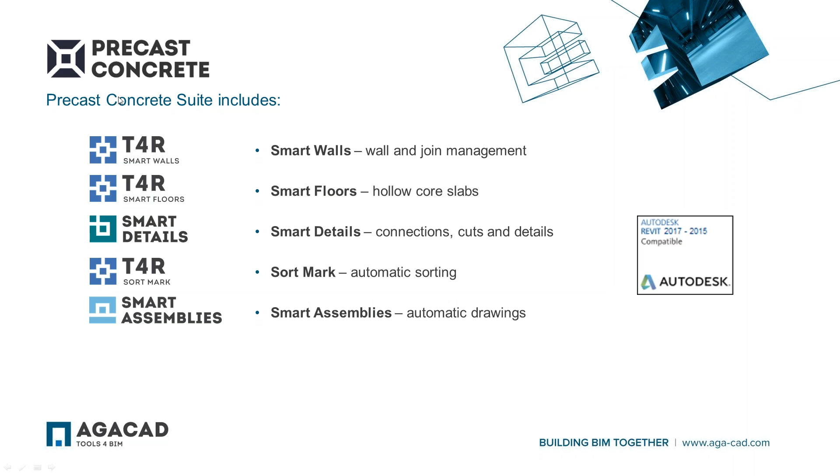So today I will talk about the Precast Concrete Suite, which helps to work with precast elements in Revit. So we will see how to create elements, insert details, sort elements, also create automatic drawings. So you can see here I will talk about these add-ons, these tools which are included in Precast Concrete Suite. So these are different solutions and I will show how they work.

And so you will learn how to divide walls with different splitting options, then how to generate hollow core slabs, how to create connections and details, how to insert cuts to different elements, how to automatically renumber them according to different rules, how to prepare shop drawings of assemblies, and also I will mention the dynamic update assembly functionality. So you will see how it works.

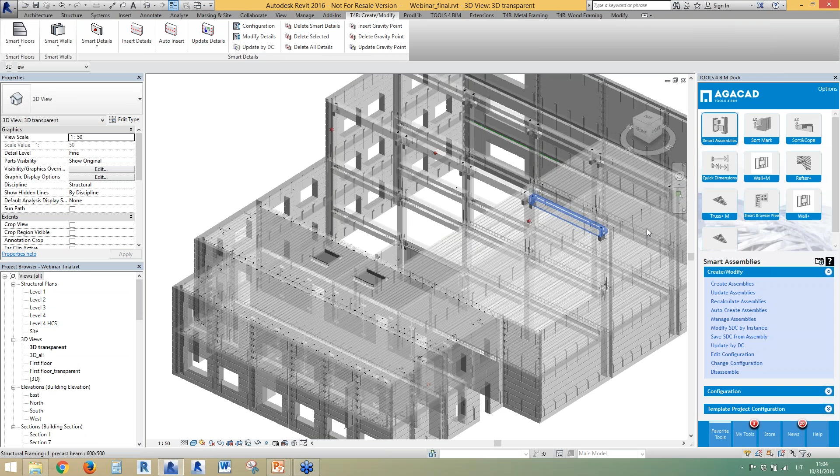Okay, so I will start the live demo. For that I will switch to the Revit screen. I will minimize this one. Okay, so now you see one sample project which I will use to demonstrate our solutions, and you will see how to insert, let's say, cuts, connection details, how to distribute all different kinds of elements you see in this model. Let's say how to create corbels, how to create insert details according to gravity point, and different other things, how to create hollow core slabs and so on.

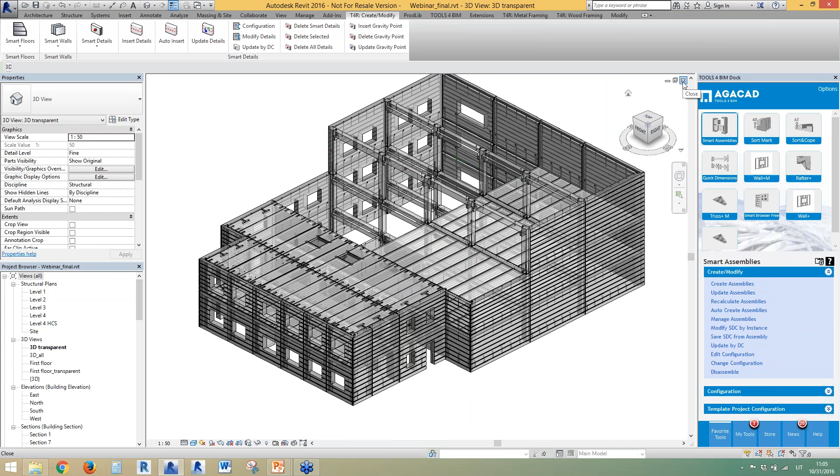So this is the final model, so I will maybe switch this off and I will start from a simple model. So with Revit you can model all of these elements using system walls, columns, beams and so on. But later we created solutions to make it work for other stages. From the beginning I will start with the smart wall solution. I will drag it here.

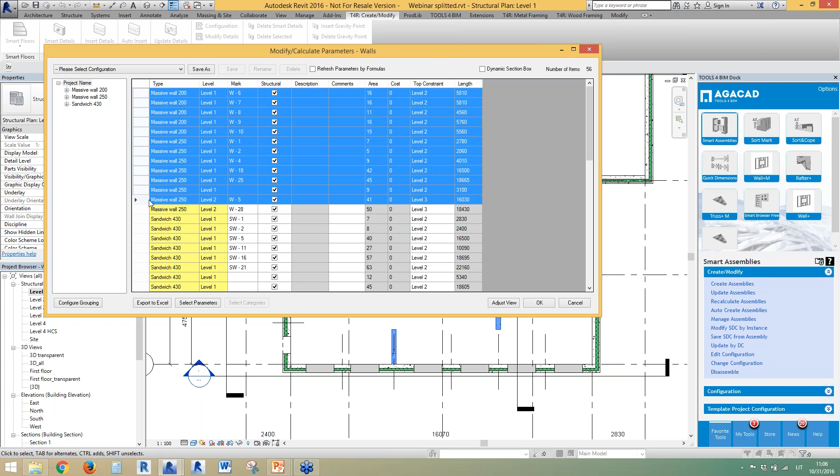You can also add any parameter you want here, and then you can use these columns to update information, check information or select elements in your project. Let's say if I drag this, you see the elements are selected also. So you can use this window for different tasks. And then let's go to other commands.

We also have functionality to decompose walls. So this function lets us, let's say, if I have a multi-layered wall, decompose it. Oh, this is configuration, sorry. This is the command to decompose wall. So what it will do, it will create 3 different walls instead of 1 wall. Or I can have 2 walls. Let's say I can separate architectural layers from the structural layers. And you see I have now a wall, and here I have a different wall and so on. So just this kind of possibility in this tool.

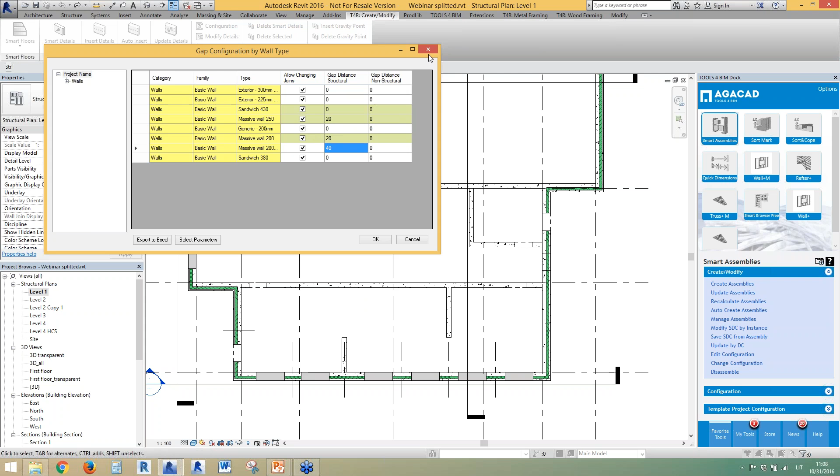And then I will talk more about splitting of a wall. So here you have gap configuration by wall type. If I open this window, you will see I have types of walls in my project, and then I can define the gap distance between the walls. So when I do the split, it will use this distance to make the gap between the walls. I can define this for structural walls and non-structural walls. I can define if I want to disallow joins or not.

So when I do this configuration, I can also define where I want to shorten the wall, at both ends or at one end. Then I have the possibility of disallow joins of walls. Then I have this split wall menu, with different commands for how to split the walls. So actually I will use 2 commands to do that. I will use this one to shorten picked wall end. So I will select that.

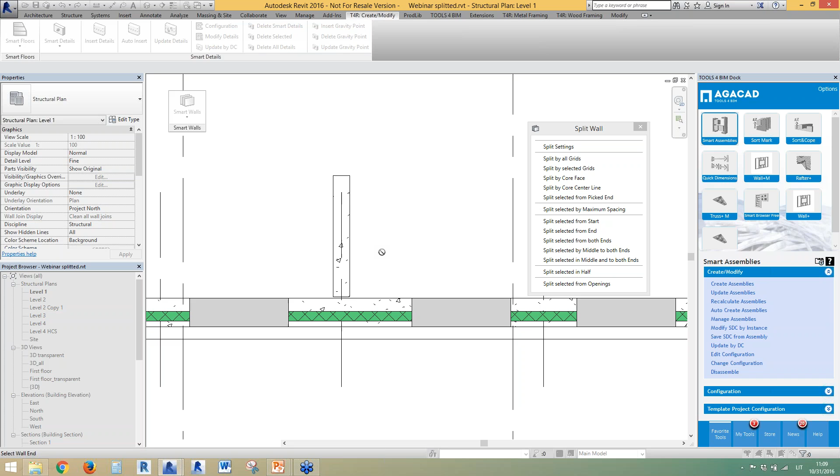And let's say now I have just 2 regular walls connected. I can select on this side of a wall, and I will have this gap which was defined in the gap configuration. I have this gap, I have the disallowed join of this wall, so I can go around and just disjoin these elements with the defined gap. Let's say I can go around and separate these walls as I want to have them as panels. Like this, like that.

Over here, let's say I can shorten like this, or if I don't like that, I can change that. Okay, so I will just go around a few more. I don't want to connect these walls, so I will do that. Okay. Let's just drag this one for the further process. Maybe I will do it like this. Okay, so when I disallowed joints and made this gap, I can use these commands.

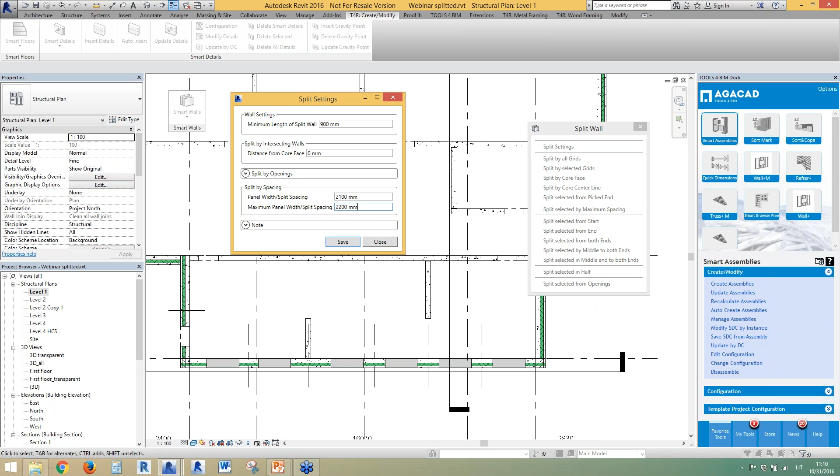So here I have split settings. If I open this one, you will see I can define the minimal length of the wall. I can define if I want to split at intersecting walls or by openings, and I can define the minimal distance from the openings. When I do automatic splitting, I will define the panel width. Let's say I want all the panels like this, and then the maximal panel width should be like this. Here's just information about the meaning of the start and end point of the wall. So I can change these configurations, and then I can use these commands.

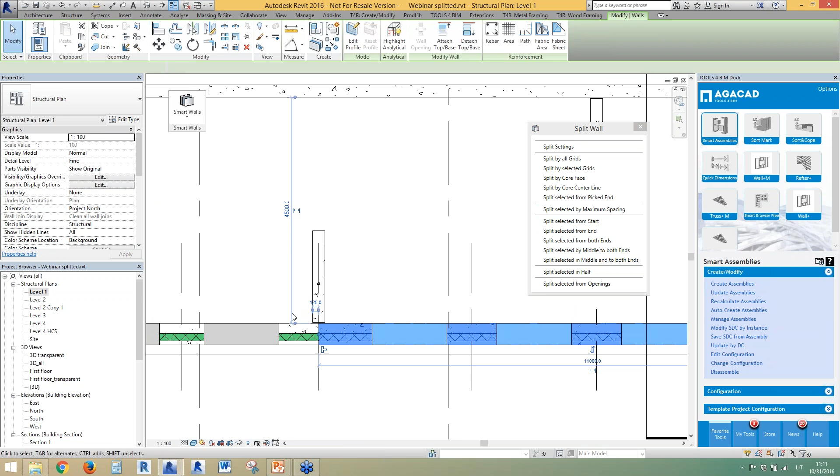Let's say I want to split by core center. So I will split this wall by using this element, and I will click escape. And now I have 2 walls split at this point. I have 0 gap for this type of wall, so that's why it's just a split wall with the disallowed joints function. Okay, let's do that a few more times. I select the wall, I select the splitting wall, and I have this separated. Maybe once more over here. Okay, so I have these walls split.

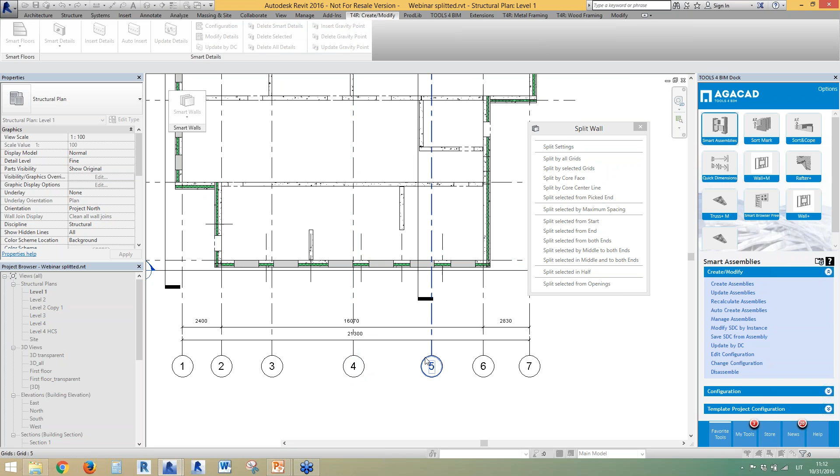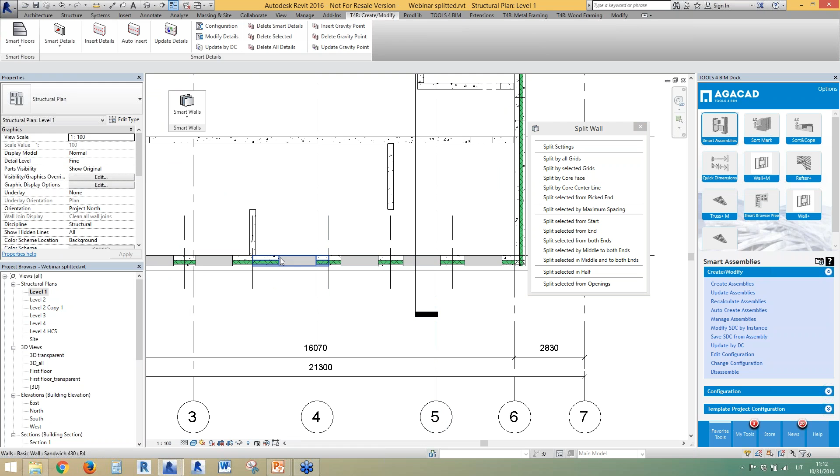Then let's try other options, like split by selected grids. So I have these additional grids, just grid lines. I drew them not as building axes, but just as additional lines. And then you see here the command you need to do. When I've selected these, I click escape, then I need to select the wall, so I will split that, and I click escape again. So I have 2 walls here. I have split this wall. Maybe I'll repeat that again, and this one. Okay, so now I have separate walls divided by these grid lines.

Okay, so then we have other different options, right? So I select the wall, let's say, and split by selected maximum spacing. So I can do that just simply. I will have these same walls split according to the rules.

Then let's say I can split from the start, so it means that it will start dividing from the start of a wall, and then it will find the opening, it will do additional split or something like that to have this minimum length from the opening, and so on. So we can use different options to split these walls.

Okay, maybe we can also do additional splitting over here. Let's see, by maximum again. So it's pretty quick, and it's better than doing this manually, and you can just use these options for splitting of a wall to control all of your joints of the walls and gaps.

Okay, and in the end we have the possibility to insert gravity point or insert one gravity point for a few selected elements, but we will not do that. We will have other commands for how to do that. So we'll talk about this later with different solutions. So let me check that. How does it look? Okay, so I have my wall split here, so probably it's enough for this demo.

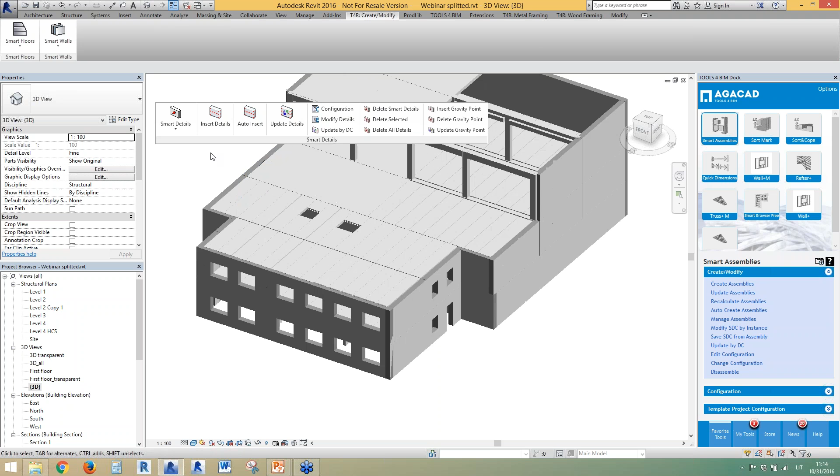Let's take a look at other solutions. So we have the Smart Details solution. This solution will let you insert different details in your element. So let's say you can use it for the walls, columns, beams, and so on. So I will just maybe do something for this. Let's say I select the element, and if I want to insert details, before that I have to prepare configurations.

And how do I do that? I will just open this configuration window, and you will see that I have here on the left side tabs for selecting what kind of element I want to insert. So these are for the line-based elements and these are for the point-based elements. And then I have tabs where I can define what kind of element I want to insert.

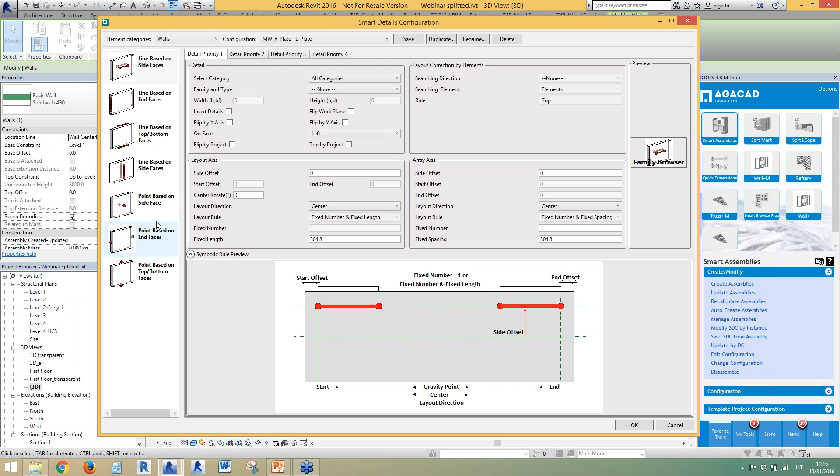So let's say if I switch to this one, I see that this one is green, so I have selected a family from the list, a point-based family. I can also select it from here, by using pictures or from a list. So I select the family. I have different flipping options. I have the possibility to insert it on one or the other side of the element. Then I have rules. How do I want to insert this element?

So let's say this over here, I want to insert from the start with an offset of 400, from the end with an offset of 400. Then I have layout direction, I have rules. How do I want to distribute this element in one direction? And here I can define the other direction, how I want to insert these elements. So I can have a lot of these elements; let's say here at the bottom, I want to insert these tubes with defined rules. Then again, on the top, I want to insert these elements.

And here are also layout correction by elements options. This one gives the opportunity to search, let's say vertically, for elements or for faces. So if you search for elements, to the top, you can select, let's say, structural framing elements, and it will insert this detail only at the intersection point with the structural framing element. It will not insert by using these rules, but at the intersection point. So we will see how it works in practice.

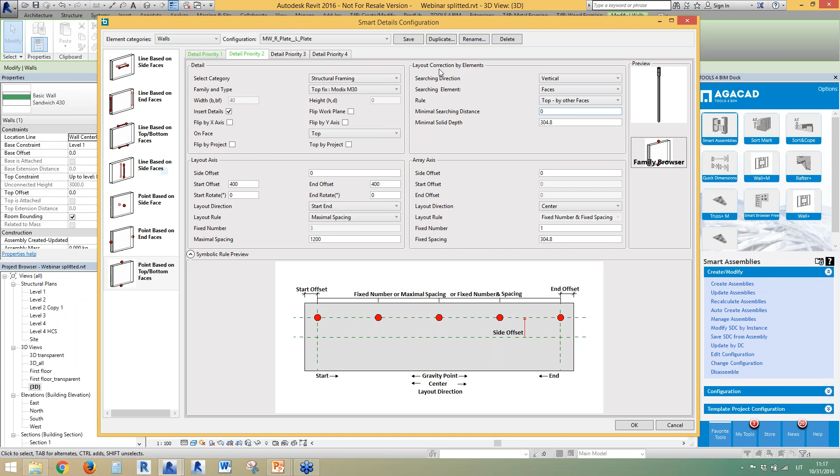And here is another option, to search for the faces. So you can also search if there's enough space. Let's say I can define the minimal solid depth value, to insert a detail or skip insertion of the detail, and so on. So here are some layout corrections of elements. So you can use this additionally.

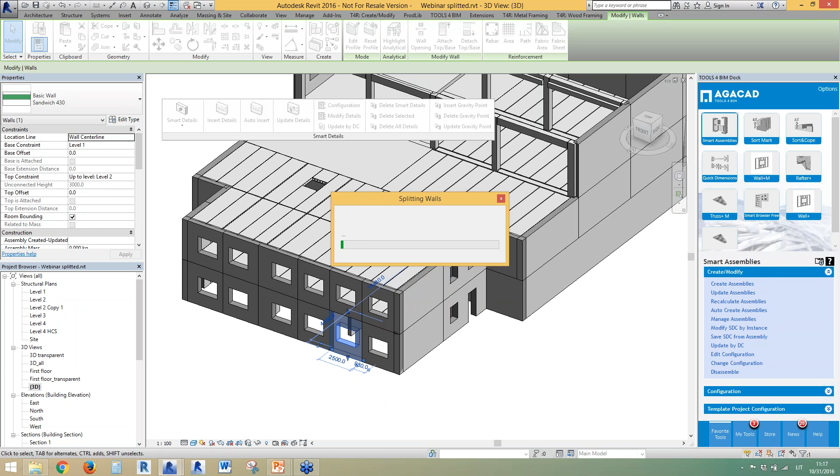Okay, so let's start. Let's insert some details so we can take a look at how it looks. Let's say I have configurations saved with defined rules. So let's say I will select this one, okay, this one, and I will click on insert. So you will see, let's say I have distributed cuts on this side, right? Maybe I will switch to 3D view to take a look in more detail at this element.

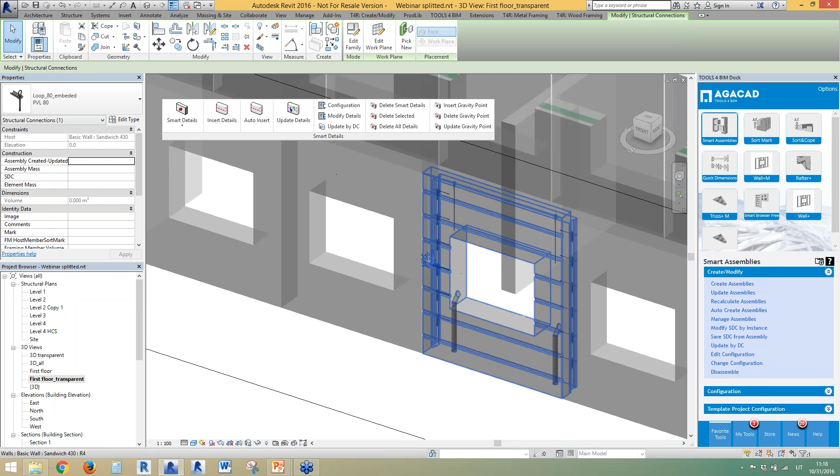Okay, so I have also point-based details inserted on the top, on the side faces with a defined rule. I have these inserted on the top. I have also this kind of cut inserted just on the top to support the floor, the hollow core slabs, and so on. So you can do that by selecting a different configuration and inserting these elements.

And okay, let's say I will now select some structural framing elements, and I will show other functionality. Maybe I will filter these girders, right?

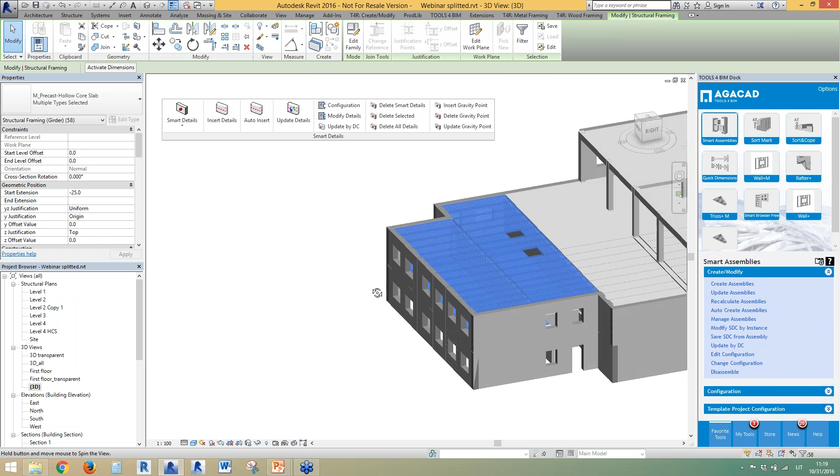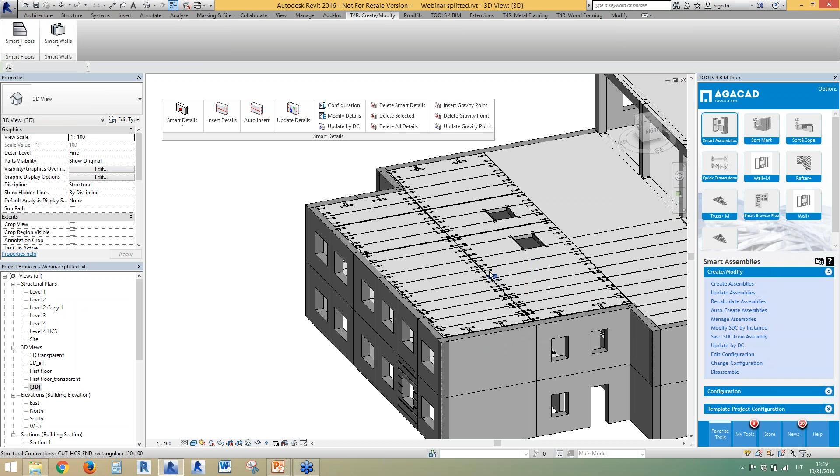So I will have these hollow core slabs, and I will auto insert. I will use this command. So this command just reads the parameter from the element, the name of configuration in the element, and it will apply the defined configuration for this element. Let's say this element, if I select it, it has this parameter, smart detail configuration, and it has the name of configuration I want to use.

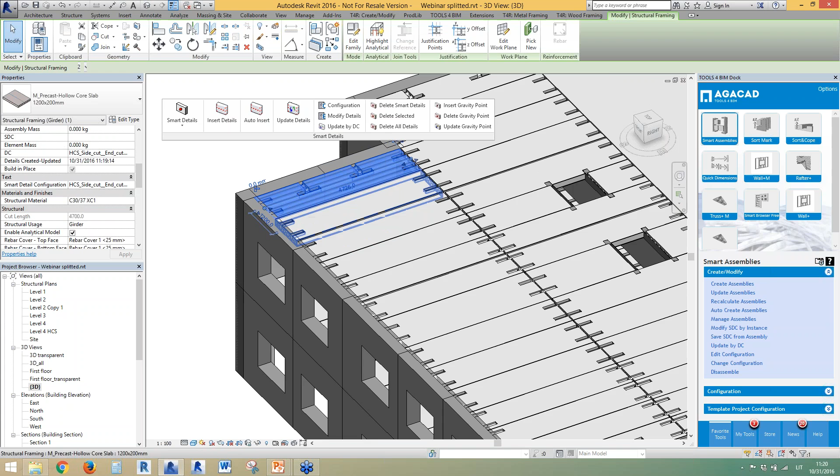So this configuration defines to insert just some line-based cuts on the top with defined rules, and it goes like this. But this element has additional details on the sides, so this one has a different name of configuration. So auto insert reads the name of configuration and applies it to insert these details to the element. So I have entered the names of configurations and then I used auto insert. That's why I now have all the details inserted to all of these elements automatically.

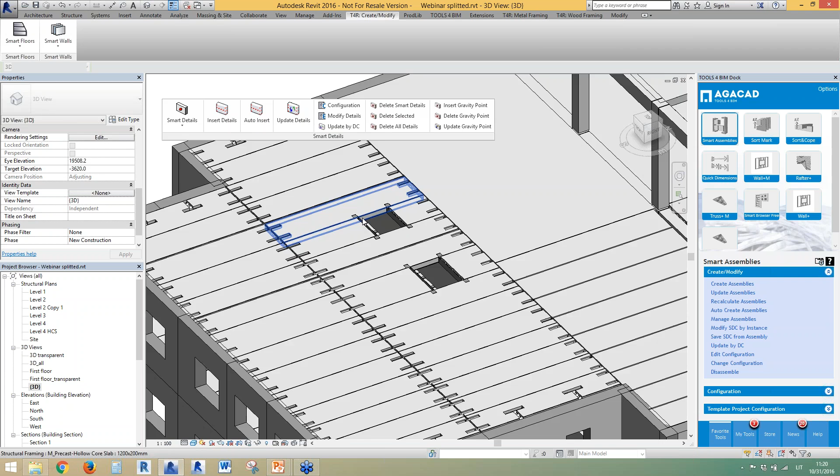So this could be an instance parameter, like you draw the hollow core slab and it automatically has this parameter, right? So you don't need to think and remember the name of configuration you want to use. And another interesting feature of Smart Details is that you can actually read the name of parameter from the host. You can use a host parameter to define the size of your detail.

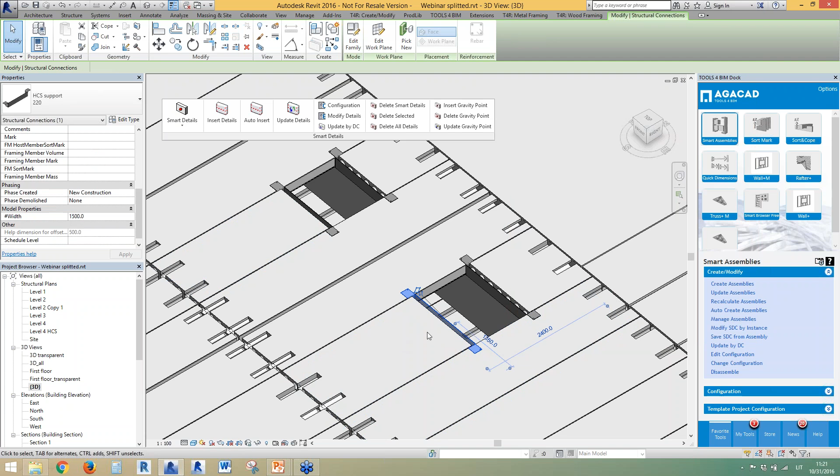So let's say this supporting detail has a width of 1.2 meter, and this one has 1.5 meter width, and that's because it reads the host element parameter. This host element has this width parameter of 1.5 meter, and during the insert, my detail is updated by using this parameter, by using a hash in front of the name of parameter, and it will use this to define, let's say, the length of my detail. So you can adapt your details to the size of your host element, or to the size of the connecting element.

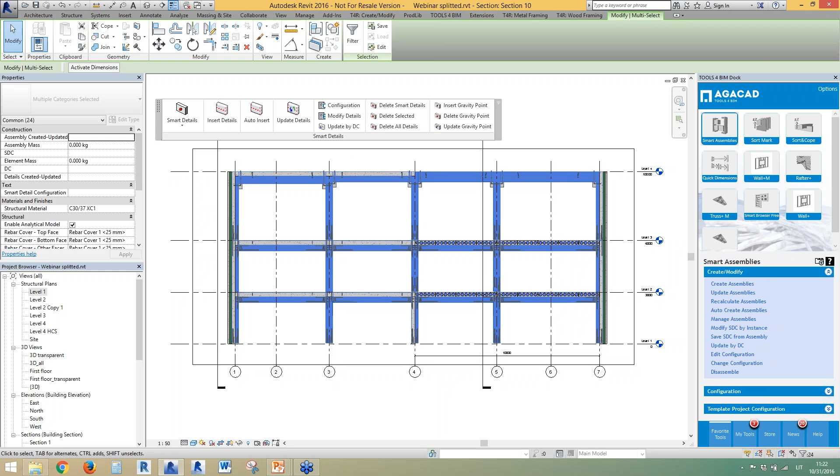So let's see another option. I'll switch to this one, and I will select now all the structural columns and structural framing elements, and I will auto insert details again. Let's just see a few different options, and how they could help to make you more efficient. So let's say I have short columns here. Okay, let's see this one.

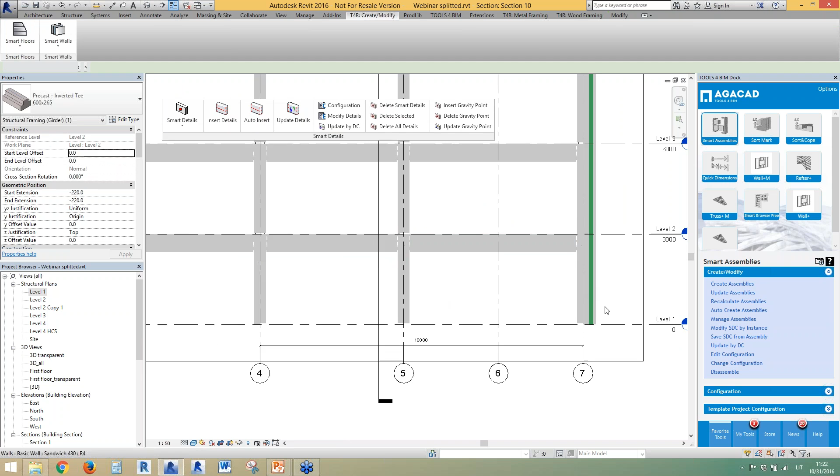So I have some details at the bottom, I have bolts inserted on the top, then I have some connecting steel corbels over here. If I was to modify these details, you can modify them anytime. So here I have a rule like search horizontally for the elements, search for L connection, and search for structural framing elements. So when I find the intersection with a structural framing element, I insert this detail. So if there is an element, you have this detail. For this column, on the side where the intersection with the element is, I have this detail inserted.

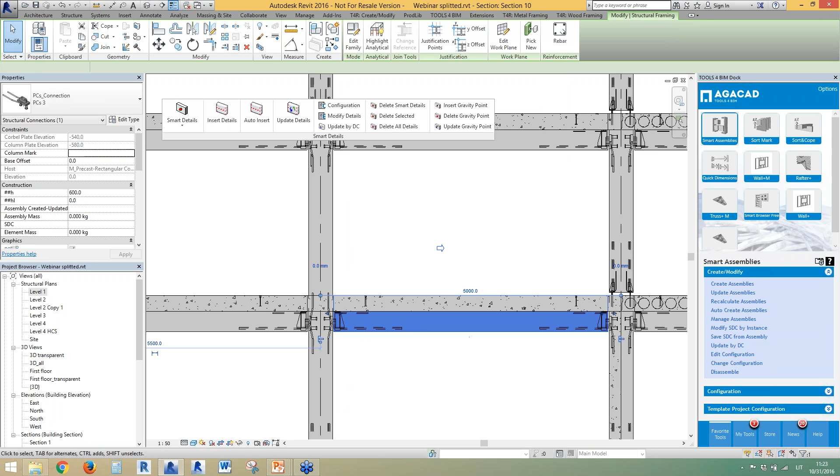Then I have a column going from the first floor to the third floor, and here I have set up different ways to insert details. Here I have a T connection, like a T letter, and here I have an L connection, because this is the top of a column, so I need to insert a different detail. That's why I can define what kind of connection this is. Over here I insert this detail by using rule T connection, and here this detail by using rule L connection. So I can insert different elements depending on the connection of elements.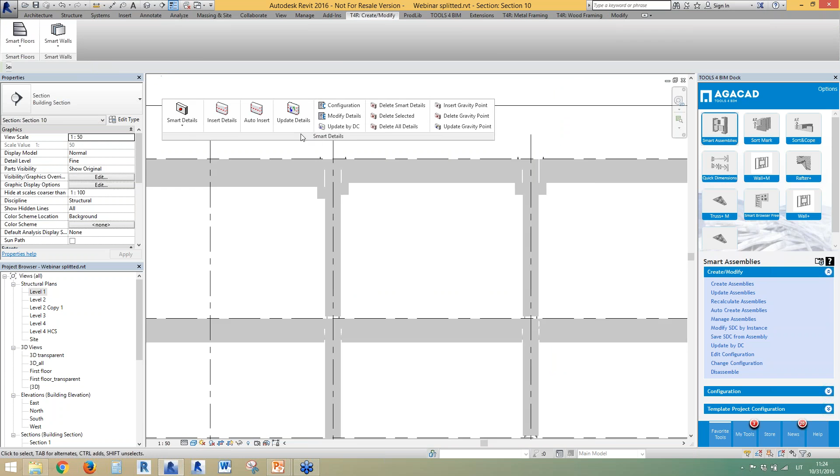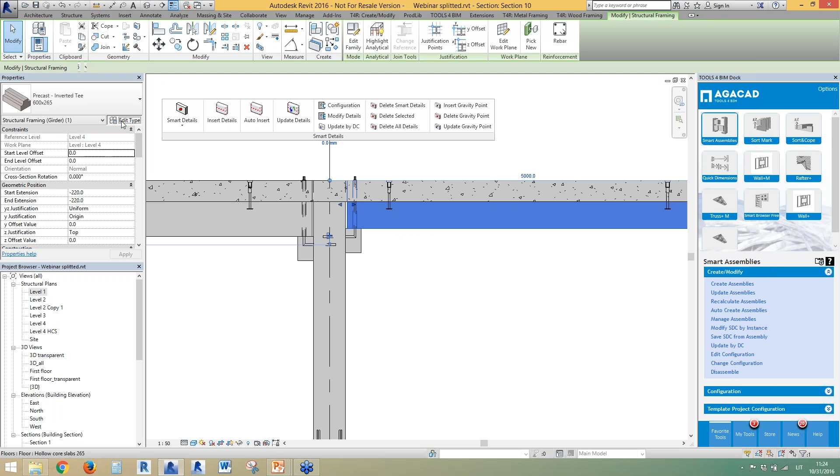Over here, I insert this element on top by using the gravity point, and a fixed number and fixed distance to define the distance between elements. Here I have different corbels with bolts. Again, I have two different sizes of beams, because I read the parameter from this connecting element. I use a hash symbol before the name of parameter, and I can read this H parameter from the host element. It has 600, so I read it and I move this corbel according to the situation. So you can adapt this also.

So let's see another example for the columns. Okay, maybe I can do that over here. I'll select two different sizes of columns. Let's insert these details, and you will see these details are in the corners of this size of column, and these are in the corners of the other size of column.

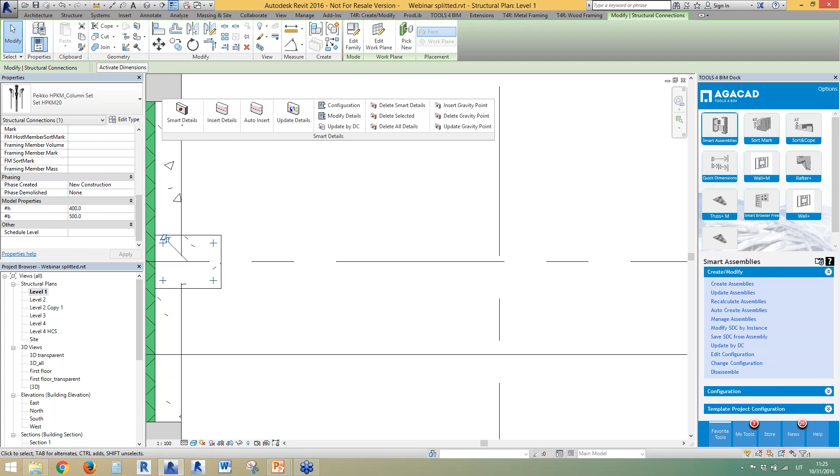So you don't need to do any manual changes. You just need to read parameters from the host element. Okay, so that's like this. Let's say this. Okay, maybe it's enough to understand the functionality of this tool.

Of course, you have here options to update details, to modify details. You can do changes in the elements anytime by modifying them, just changing the type of a detail or the spacing and so on. So you can modify them anytime, and update details if you have deleted something or changed the configuration, pretty easily.

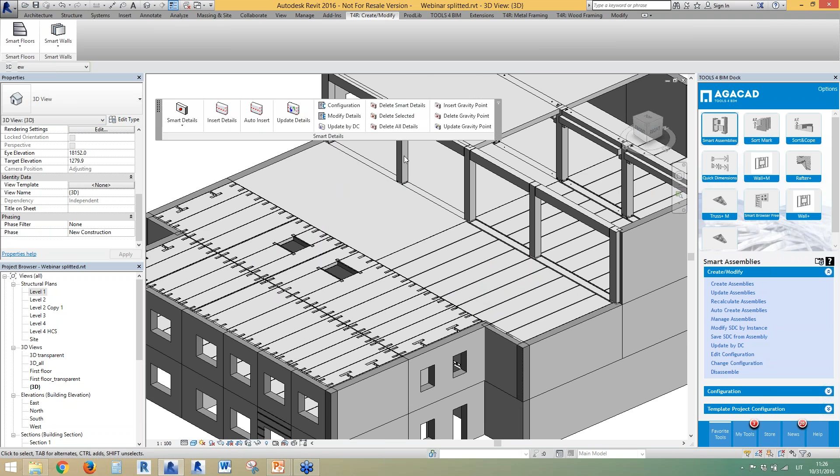And here are some options to delete elements, like if you want to delete just one rule element. So let's say this one, right? You can also delete only smart details or all the details, because maybe you have some manual details. So there are options to control, modify, and update all of your elements all the time, so you can stay in control of what you created and the changes in the project.

And here are also options to insert the gravity point of the element, for the hosted element, and to delete or update this gravity point. But actually, when we are talking about the full suite, inserting details, renumbering elements, and reaching the shop drawings, maybe the best way is to do that in the final stage when we do the assemblies. We have a tool for that, and I will go through it later.

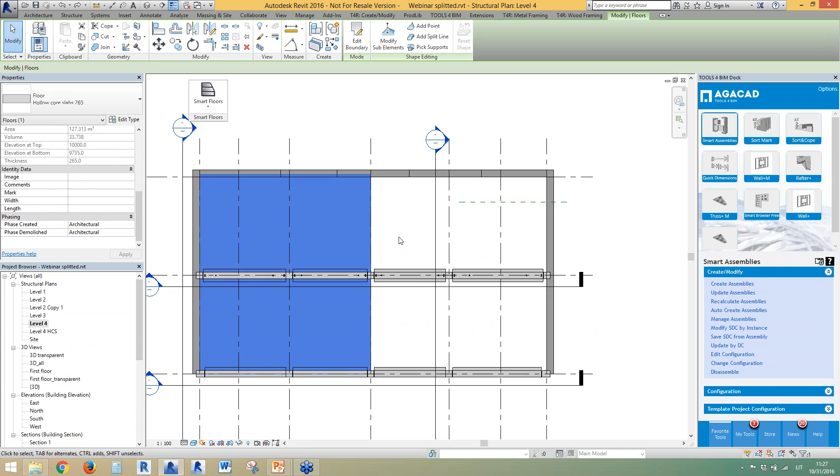Okay, Smart Floors solution. Another solution is dedicated to creating hollow core slabs. So I will go to plan view and show you a few options, a few tips on how it works. There are two ways to insert these floors. There is a way to insert and update floors with a command. You can give a name of a group. You can select the boundaries to define where you want your elements. Boundaries could be walls, beams, reference planes, grid lines.

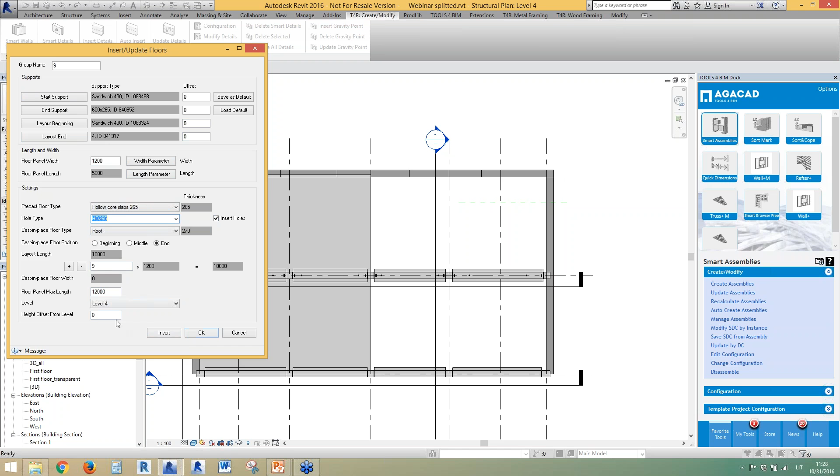I will select these to define the boundaries. Then I have parameter names. Then I select the floor type, and insert holes if I want to. There's some information about these elements, the level, the height offset, and so on. I click on insert, and I have these floors created. So I have a floor with width and length parameters, and here is the generic model, line-based element inserted as a hole.

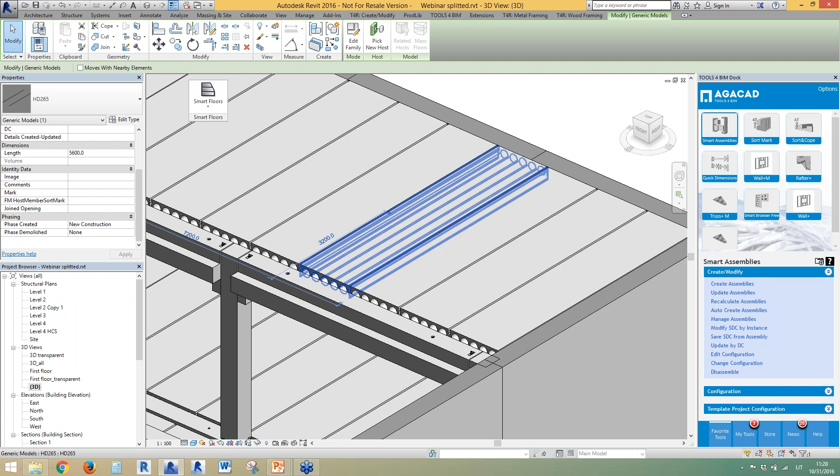So it's just a simple family which we can modify, we can change the hole sizes and so on just by drawing the profile of the holes according to your local manufacturer, and it will be inserted over here. You can use it to define the shape of your hollow core slabs. So this is one method to insert them.

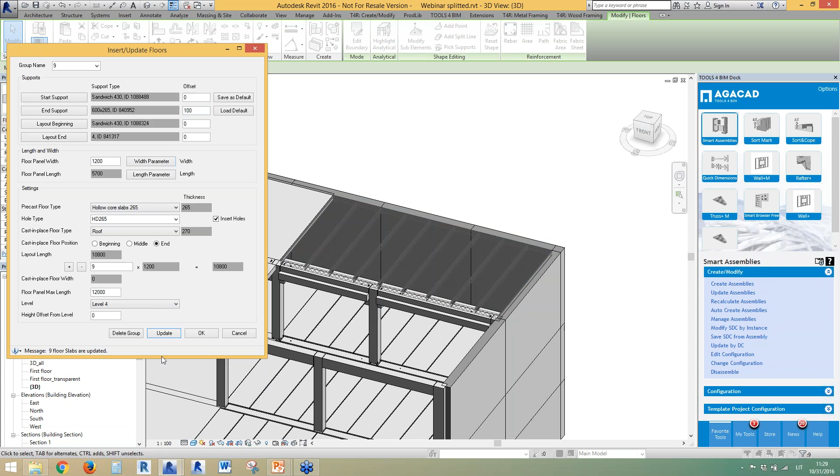Actually, when you insert them, you can use the same command. Let's say I select one of the floors. I can make changes. Let's say I want to change this support. Okay, so my ends are moved, or I can do all different kinds of updates, splitting of these. I will select the floor. Again, I can change the layout beginning.

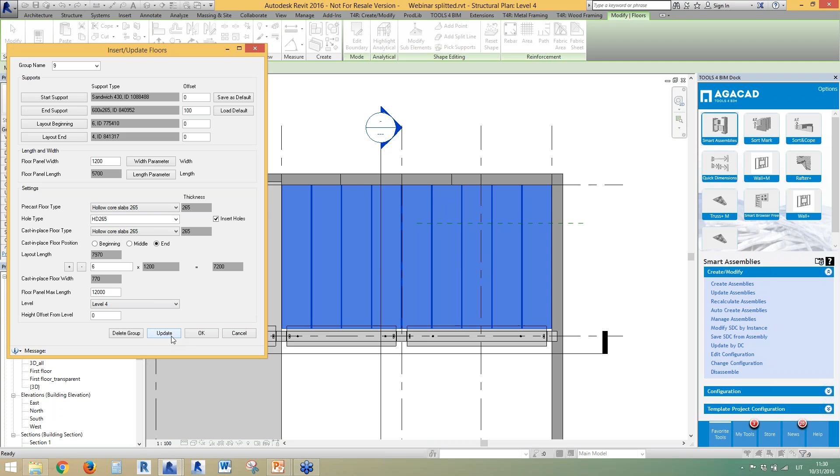If I select that, now I will also have one part which is not divided by this width, so I will have a cast-in-place floor, just a floor without holes. Now you see I have this part without holes, or I can insert holes additionally. If I have the profile I need, I can just do that, so I can insert these holes manually later. It depends on the manufacturer again and the country.

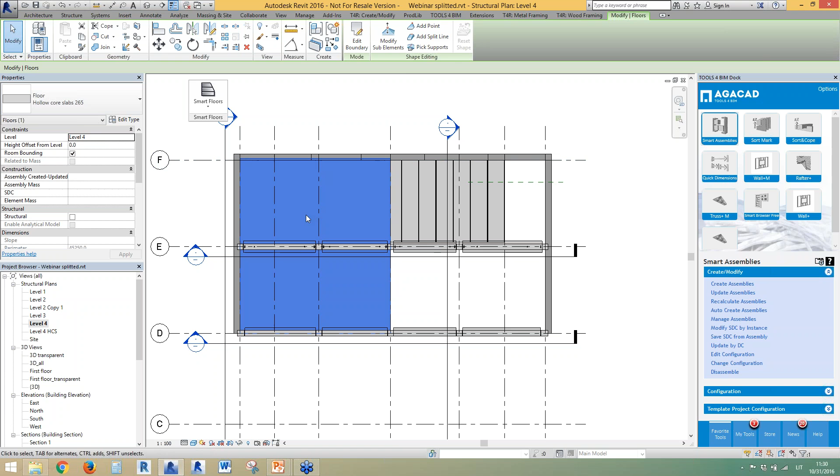Another way to insert these slabs is when you have a system floor. Let me check that. Okay, so maybe everything is fine. So I have this floor. I can use another command, floor panel layout planning. This one gives us the opportunity to divide the floor and then insert panels.

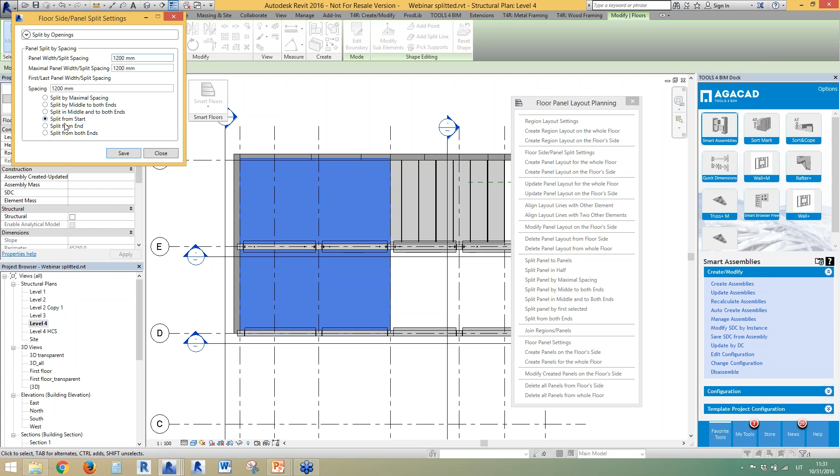So here is the first way to divide the floor. It's pretty similar to the walls. I have floor splitting options, how to split them, the maximal split, the panel width, the way to split, the rule for which side to split from. I can define that, and then split this floor. You will see now I have floors going from one side to the other. That's not the way I want it to be.

So I will just undo that. I can actually use add split line to define the regions of my slabs.

So if I do that, now if I use this command, let's say create panel layout on the floor's side, you'll see the blue rectangular is highlighted. I'll just select the side where I want to insert my slabs, and insert it in the splitting region. If I select on this side, it will go the other way, but maybe I won't do that. I'll just do it this way. Then I have different options for how to modify.

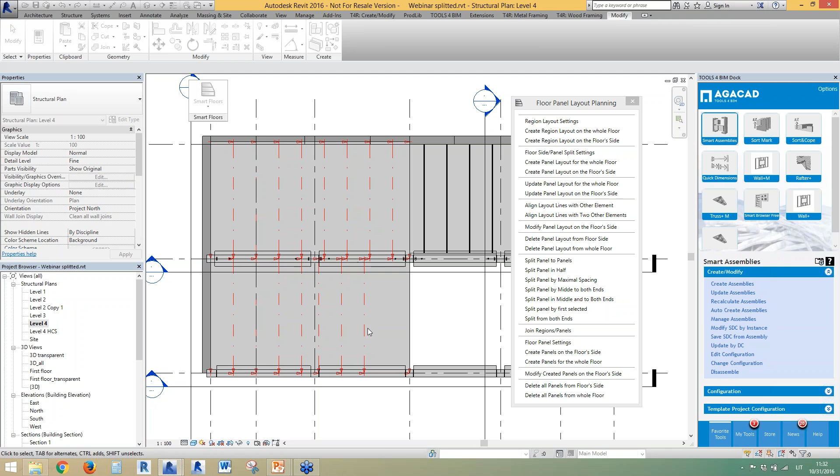Let's say I select modify, I select this one. I can split from both ends. Let's say I do update, so I'll have a narrow panel in the middle. I can join these regions, let's say a few of them. I can then split this area again into panels.

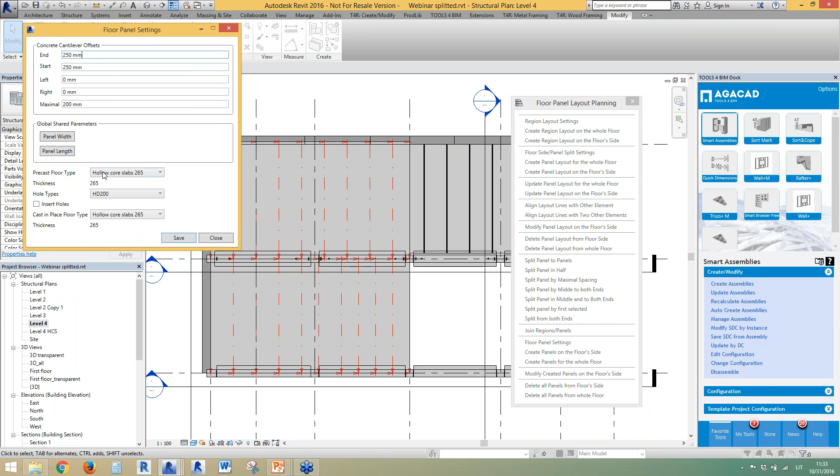And in the end I have the possibility to create panels, so floors actually. If I open these settings, I have again end and start support settings, parameters for these floors, the holes, and then the floor type, which I can select.

I can create, let's say, a panel for the whole floor. So now you'll see I have an actual floor inserted here. Let's see in this mode - you see I have the floors now inserted according to these settings, these splittings of my floor. So I can just use it like this.

So there are two options for how to insert floors and hollow core slabs, and to work it out to the final stage of design. And here are some options to place floors according to the rooms, but it's more for the finishing of floors, finishing layers, like tiles and so on. So this would probably be used more by architects, so we'll not go too deep into this.

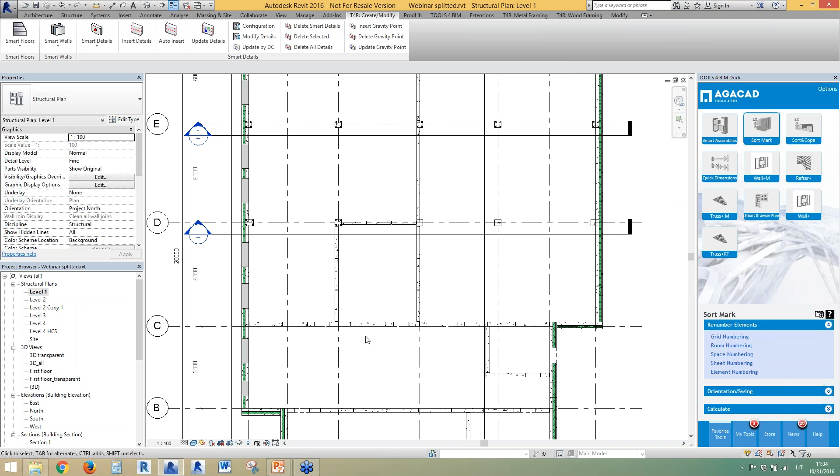So I will hide this one. And now a few other solutions - Sort Mark. This helps us sort elements. So let's say I select all of these floors, and I select the Sort Mark solution.

I have here options for how to renumber elements. I can renumber grids, rooms, spaces, sheets, and in the end I have this element numbering. If I open that, I have a possibility to select the parameter where I want to insert my mark value. Then I select the grouping options, numbering options, sorting options, and in the end I can define what the mark should actually be.

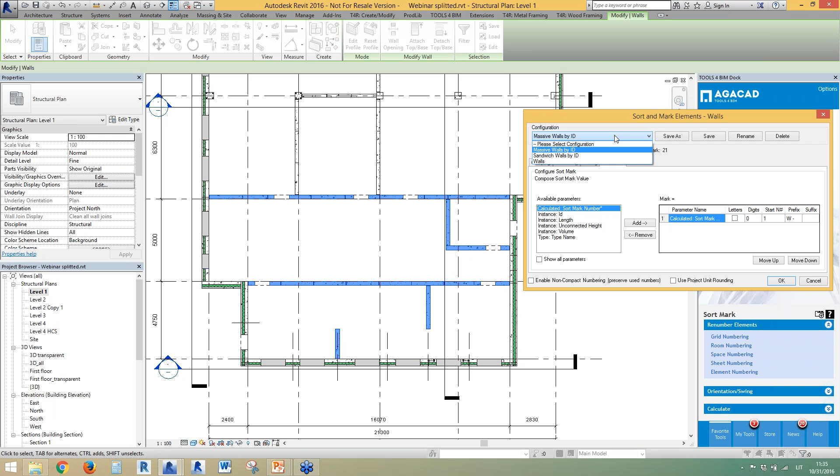I can add suffix, prefix, and then start number. I can save this configuration under different names. Let's say I click OK, and it will renumber all of these elements. I'll have a few same mark values, but in this case all of these elements now have mark values. You can do that with columns, beams, floors, and so on - it's pretty easy with Sort Mark.

So this is just a short introduction to this tool. I don't think there's too much to explain - it's just quick and effective.

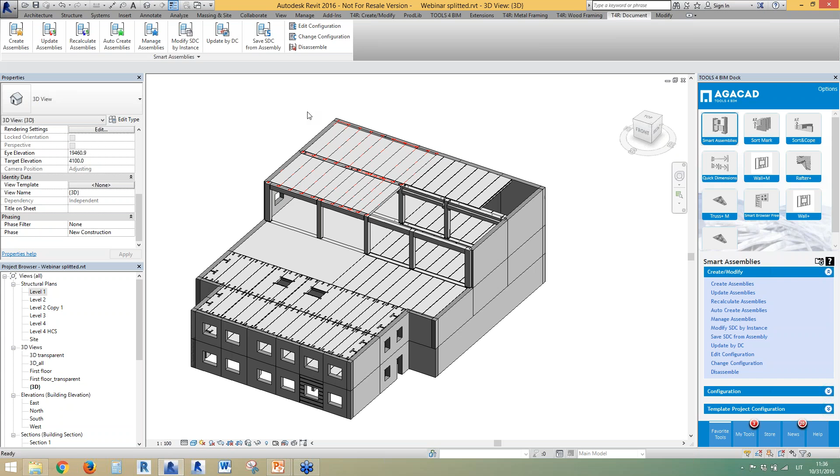And now the last solution is Smart Assembly. I'll use this from the dock, or I can open it from the Ribbon, but I just prefer to use it from the dock. Let's overview this solution, the last one I want to talk about. For this I'll switch to this project, maybe it's easier to explain. The final result, what we can expect from this solution, let's say...

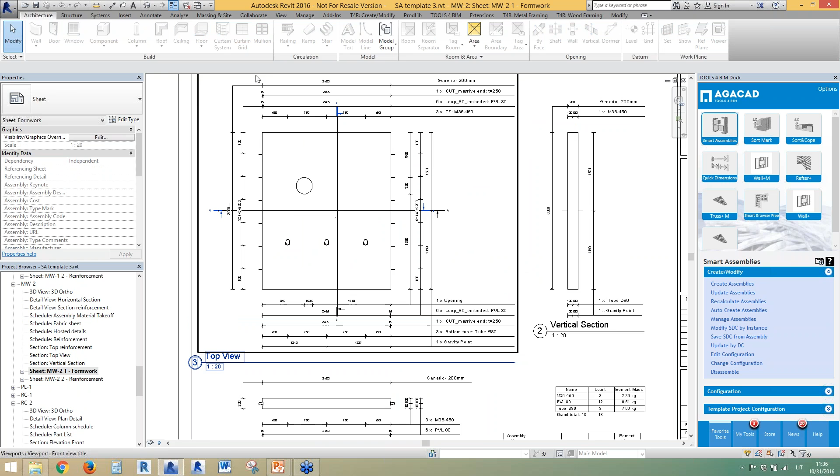Something like this could be created automatically. So we have details, then dimensions for these details, dimensions for the main element, for the details, for the gravity point if we need to, for the openings, yes. So let's see how we can do that.

To create an assembly, this is the main command, but before creating the assembly you have to have again the Shop Drawing configuration. If I open that - because when you create the assembly you define configurations, what kind of views should be created, what kind of dimensions should apply. So this is the configuration window.

Again, you can save different configurations, and here you define what kind of views you want to have. Just define as many views as you want to create, then define the view type - section, elevation, or whatever, some additional views, flipped versions of standard Revit views. Then you can select the view type for the sections, then change the name.

You can write whatever you want here in your language, and here's how you use it. Then you can apply any view template you need, including dimension rules, which are created with this button. I'll open edit dimension rule.

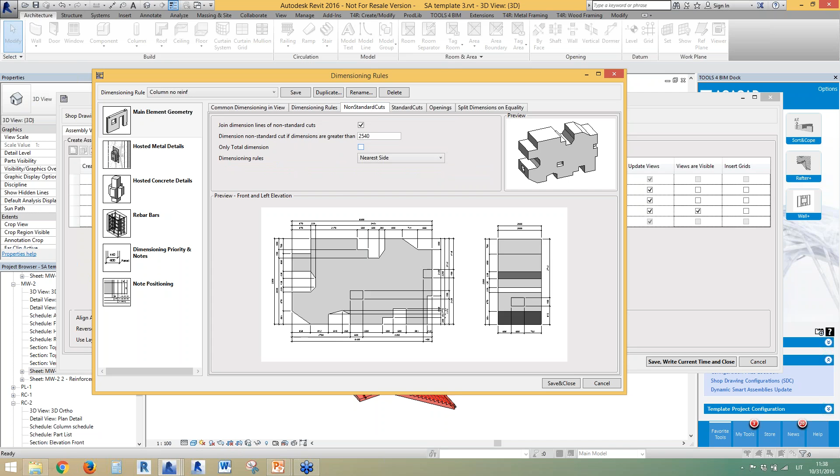Here you have dimension rules for the main element, so you can define how to dimension the main element, how to dimension visible or not visible sides of the element, dimension types, and rules for openings, like what kind of openings should be dimensioned or not according to size, or if dimensions should be grouped.

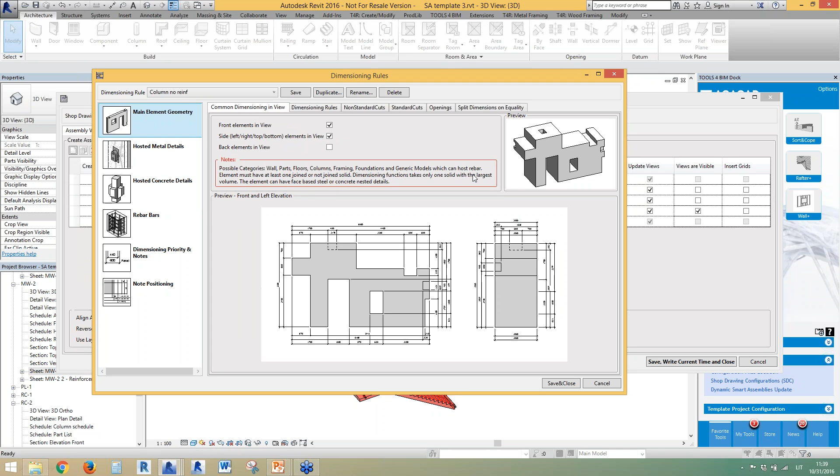So this is for the main elements, and here are possible categories described, like all different categories that could be used for the smart assemblies.

Then rules for the hosted metal details. It's not important whether it's face-based or line-based details, but the material for model behavior should be set to steel, and these rules will be applied to dimension this element. It could be dimensioned according to the solid part of the element, or dimensions could be placed according to the model lines inside the family.

So if I switch off this one, it will dimension the boundaries of the element, but if I switch on this one, it will dimension to the model lines inside the family. So you can control exactly the part you want to dimension by using model lines inside the family.

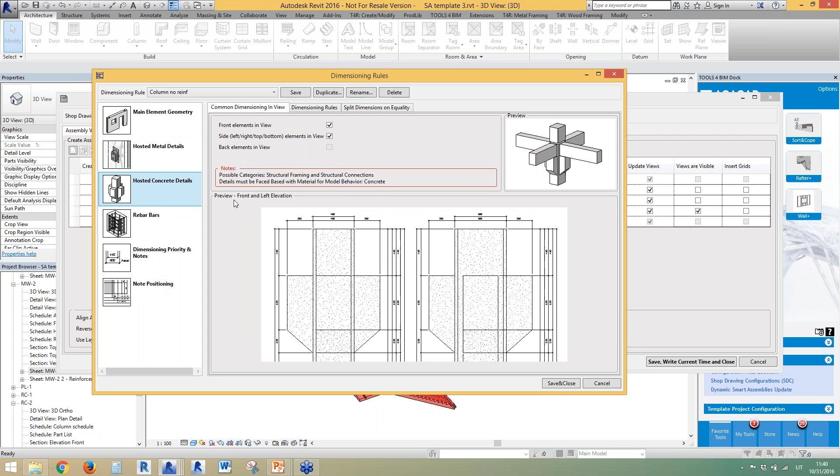So these are for the hosted metal details, and these are for the hosted concrete details. Again, the material for model behavior is concrete for these details, and all these details must be hosted to the main element to automatically include them in assembly.

And then dimension rules for the rebars, rules for the notes - what do you want to insert, what kind of dimensions, what kind of notes. You can change the names of the notes, what kind of information should be included. Then note positioning - you can choose on which side they should be defined and so on.

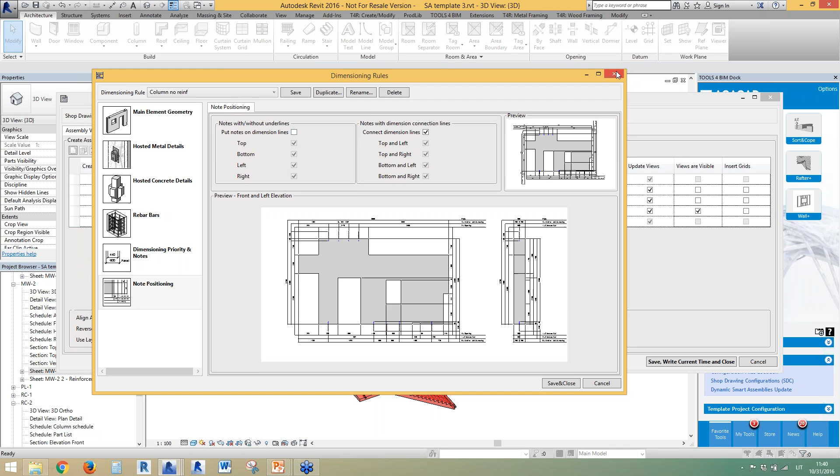And then you can apply this dimension rule anywhere on any view. Here are some options to tag elements, show gravity point, update views, reverse some elements' direction, and so on. So how do you want to see the wall - from the front or from the back side.

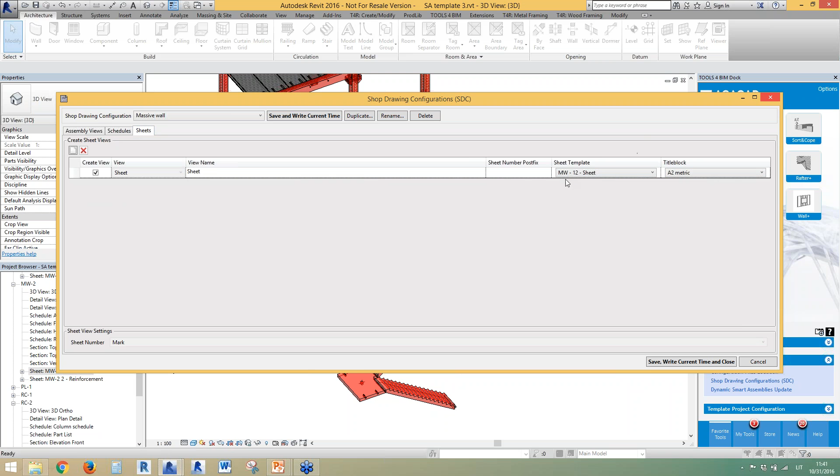Then you have rules to select what kind of material takeoff you want to use, the schedule template which you can select from standard Revit schedules, then count by instance or by type for all the quantities. And then the sheet - you can use a sheet template. So when you create an assembly, you can drag views to the sheet and use that sheet as a template to create other elements. So let's create this assembly.

What's the name of the assembly? It's MW-12. So let's see how it looks.

Then I drag these views to the sheet, and in the configurations I define that this sheet should be used as a template for other elements. So when I create an assembly from the element, it will also place views on the sheet. Of course it should be a pretty similar size to make it work fine, but that's the way it works. So let's select this element and see how it works.

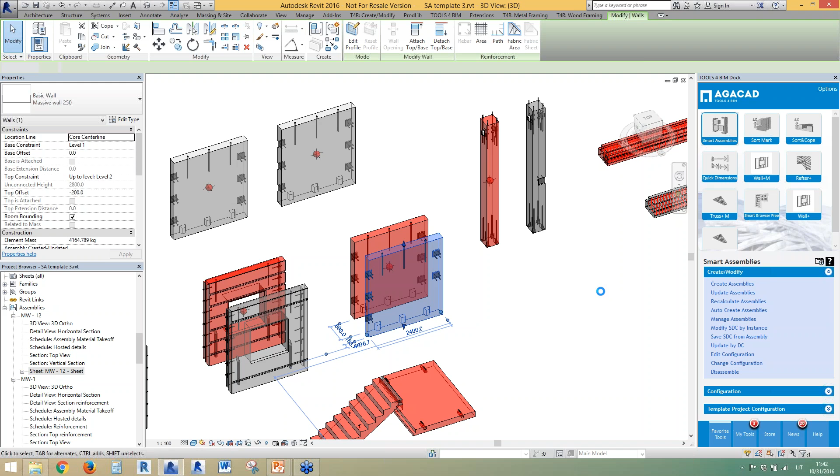I will create assembly. Okay, I select the configuration which I want to use. I click on create.

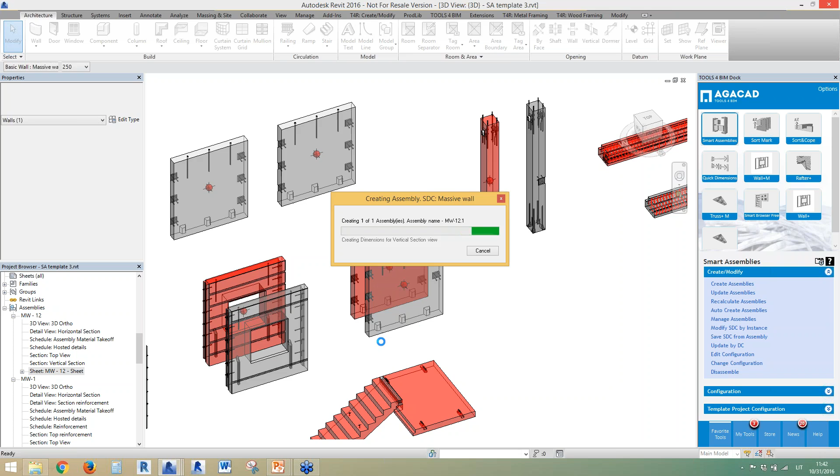And now the new assembly will be created. During this process, all the details which are hosted to the element are automatically included in assembly. So you don't need to go and add elements manually - they are automatically included in assembly, which saves a great amount of time.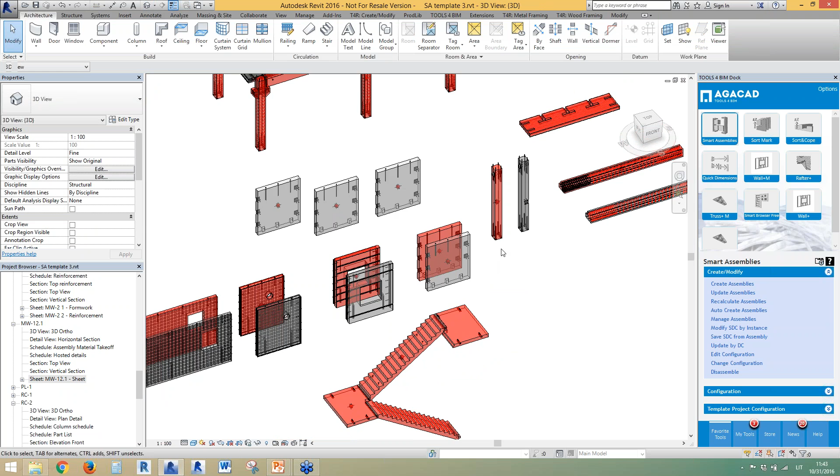Let's see, what's the name? 12.1. Okay, so let's see - now you see this one was created and views are placed just like in the previous assembly, just like in the sheet template. So the front view is here, the section is here, some schedule tables, and I have this 3D view also assigned here. It's just placed in the way the sheet template defines.

And here you see the template file. So I create different assemblies here, I place them on the sheet, so I can use this in my project. So when I select an element and click on create assembly in this new project, I can use this template.

Okay, but I can define the template project, the project which is a template for me, and I will use these assemblies in the template project to create assemblies in my new project. So when I define where my template project location is, I can also transfer information from the template project.

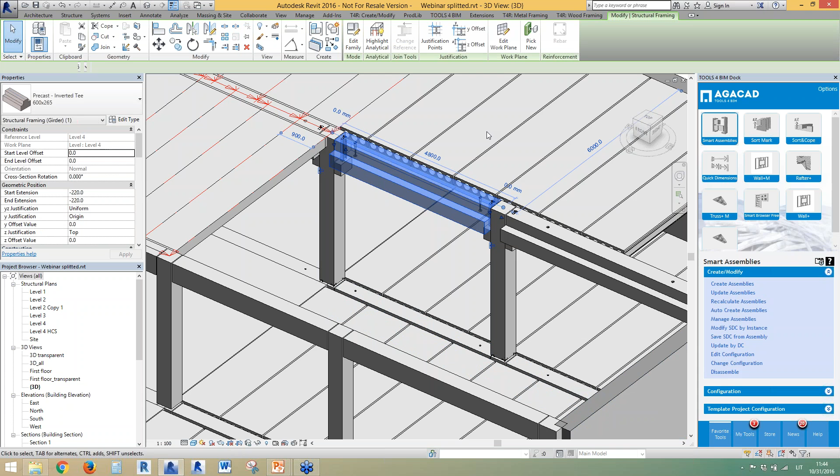Then I select the element and create assembly. So it will not just create the assembly and the dimension rules, but it will also apply this configuration I use. It will also drag views to the sheet because of this project template. Let's see now, I'll switch it.

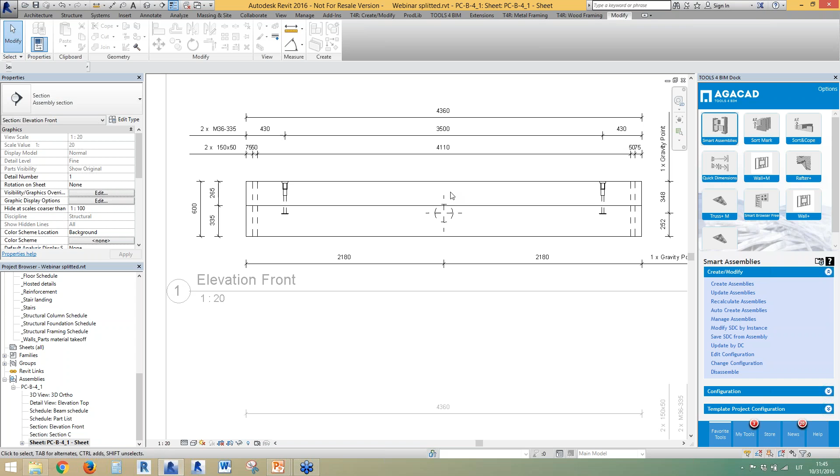So this is the first assembly in this project, right? Zoom to fit. Now I created assembly, all the elements included, automatic dimensions, right? Including to define the openings, the lifting details, the gravity points - I have these selected to show it. I can switch it on or off, but I have all the views in the sheet automatically.

It could be in such a way. And then over here, again, you have different options to update assembly, to recalculate. Recalculate will only calculate the gravity point location if you don't want to update drawings, but you want to update the gravity points or something like that.

Then auto create assemblies works the same as auto insert details, as I showed you. Here is the name of the assembly configuration. If I have this name, I can use the auto create assembly command.

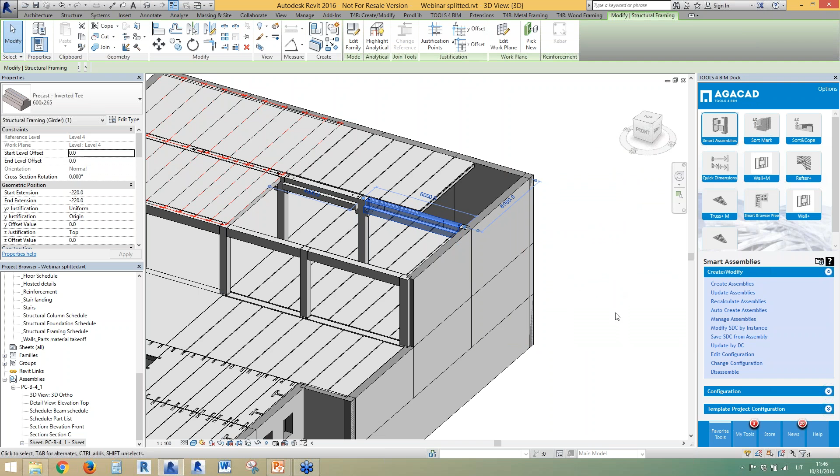Then manage assemblies gives us an option. I will switch back to this one to show you better - in this window, I can select the element anywhere in my project and find all the same type elements, or I can select only the primary assembly. So primary assembly is assembly with drawings.

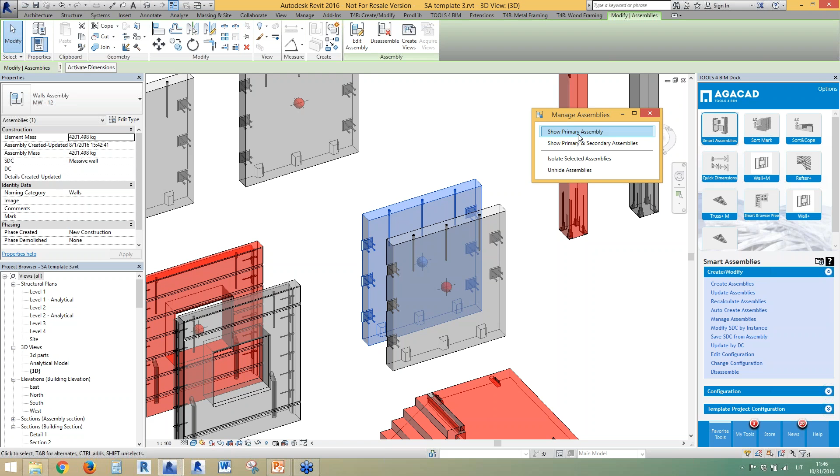So let's say if I select all of these elements, they have the same type, they are exactly the same, right? But only one of them has drawings. This one can acquire views from the primary assembly, and this one is the one with drawings, and these are just copies - that's the way Revit works. So this functionality gives you the possibility to find the primary assembly or to find all the types.

Why do we need that? Why do we create this one? It's just to manage, to find elements of the same type. It's also good, but the main reason was because we created this dynamic smart assemblies feature.

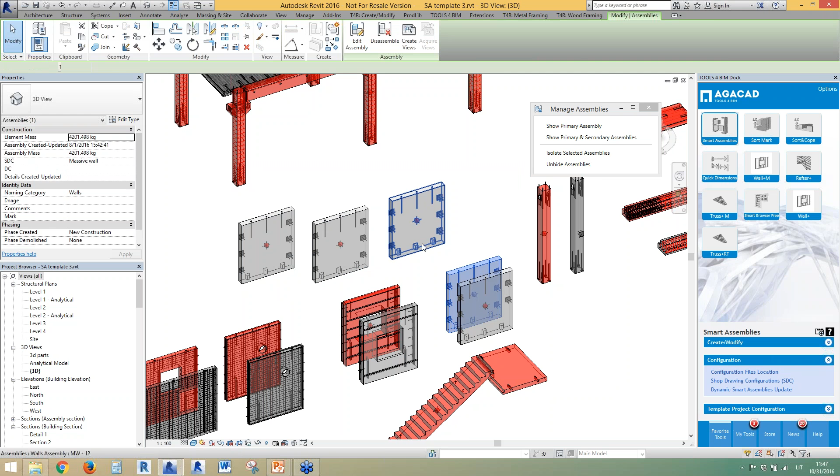So if I open this one, I can switch it on or off. But if it's on, then if you want to make changes to assembly, it will work a bit differently from Revit. So if I want to make changes to the secondary assembly, which does not have drawings, and I want to delete this, I will get this question - it will not just create a new assembly for me, but it will ask: do you want to really make changes to this element? Maybe you want to create a new assembly, or do you want to skip this and review your decision.

If you just don't create this, don't delete this detail, it will show the primary detail so you can compare. But if I click on yes, it will create just a new assembly according to the configuration used for the primary assembly. So it will create a new assembly with drawings automatically - it will not just create a new assembly, now it will also have drawings created.

But this was when I made changes to the secondary assembly. If I make changes to the primary assembly - this one is primary with drawings, right? Let's say I'll do the same, I'll delete that. So it will ask what I want to do: do I want to update, do I want to just recalculate assembly? Let's say I'll click on update, and you'll see now it's updating.

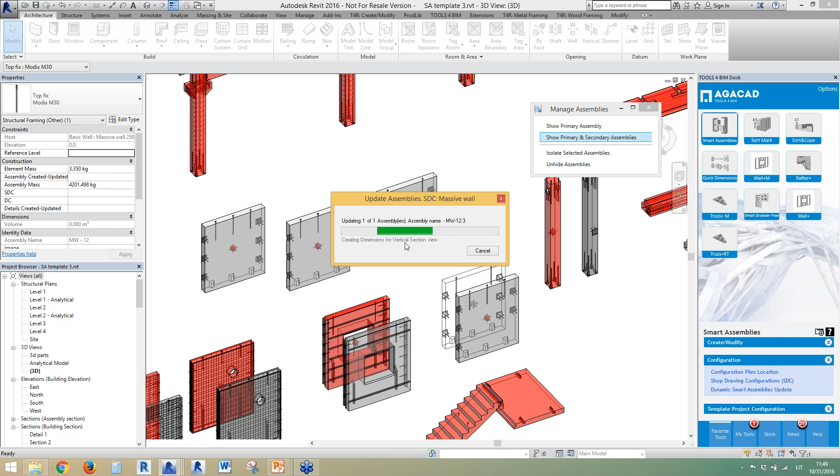Okay, maybe I'll do that again. So it will update my assembly, it will update drawings, and it will also update secondary assemblies. I can cancel that, or I can do these changes. Oh, I clicked on cancel - sorry, I'm so quick to cancel everything. Okay, let's do that again.

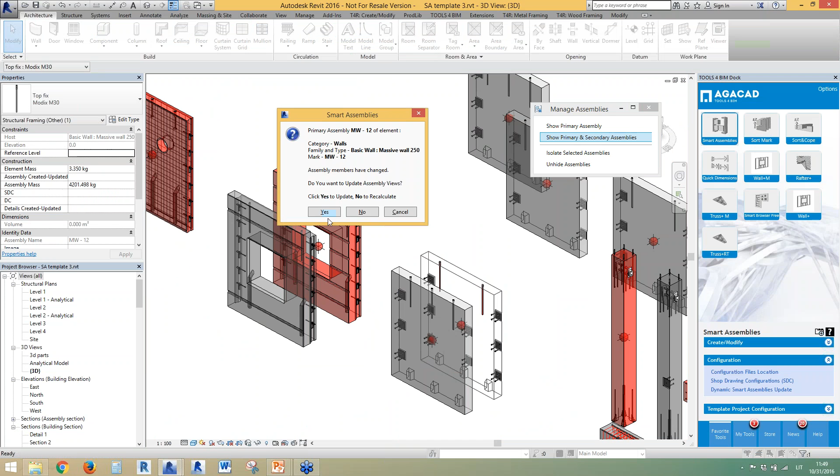I need to update. Let's say it will update the dimension lines and my views. It should have deleted my element. So something is not working as I expected, actually. I don't know why, but it should have deleted all the details in my secondary assemblies. Sorry about that, I don't know, maybe I did something.

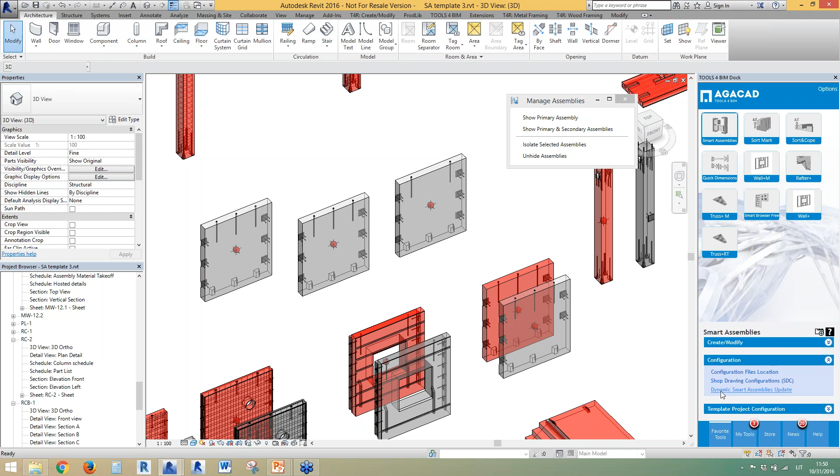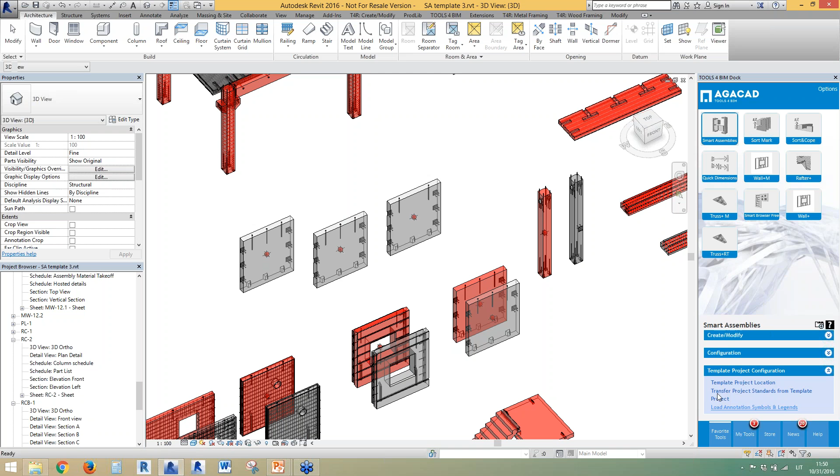I can't figure it out quickly, but the main idea is to update all the same type assemblies with dynamic update, and maybe it's because I'm using the beta version. So it didn't work out somehow. I'll take a look at this later on, but I hope you got the idea of what should be the benefit of this one.

And okay, in the end you also have the possibility to modify elements, just to change dimension rules for individual elements, for the instance elements, then save configuration from the element. Let's say you got the file from a colleague, you can save this configuration, then you can update, edit, change configuration, or disassemble elements. So here are the features of this solution.

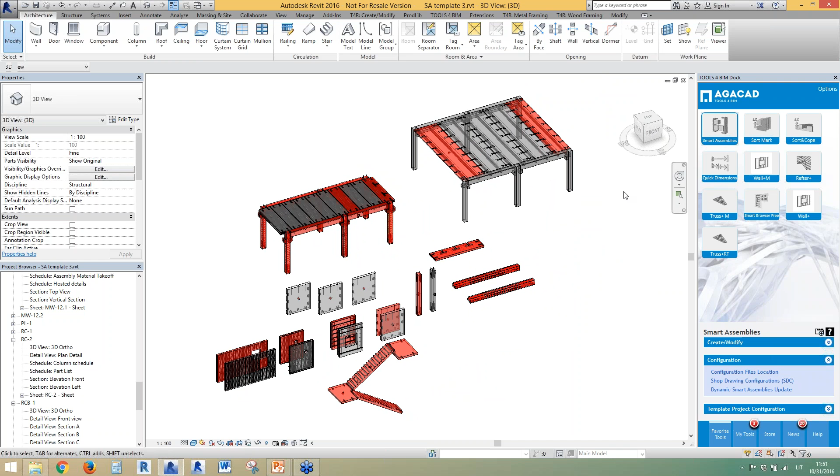And configurations could be saved, could be in the company location, or could be sent to colleagues. So they could be used in different ways. It's not related to a project and so on. Yeah, probably that's what I wanted to show, and maybe a few words about AGACAD, that we create a lot of different solutions. So these are just for the precast.

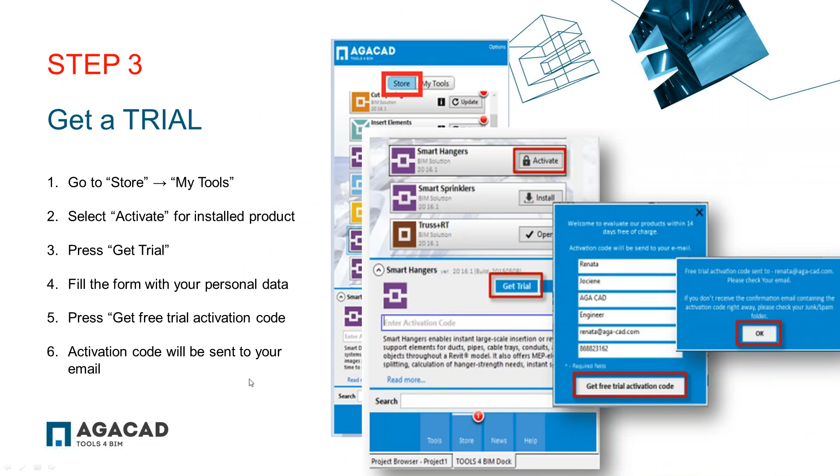Right, Annalise, do you hear me? Thank you, Valensas. Yes, can you see any questions in the screen? Okay, I'll try to switch that because I see something is, it's interesting because it's like flashing, okay, but I can't see any questions. Maybe you can, but I'm not sure if they're in Dutch or in English. Oh, I see they are coming, I think. Let me check that. Okay, so I have questions, yeah.